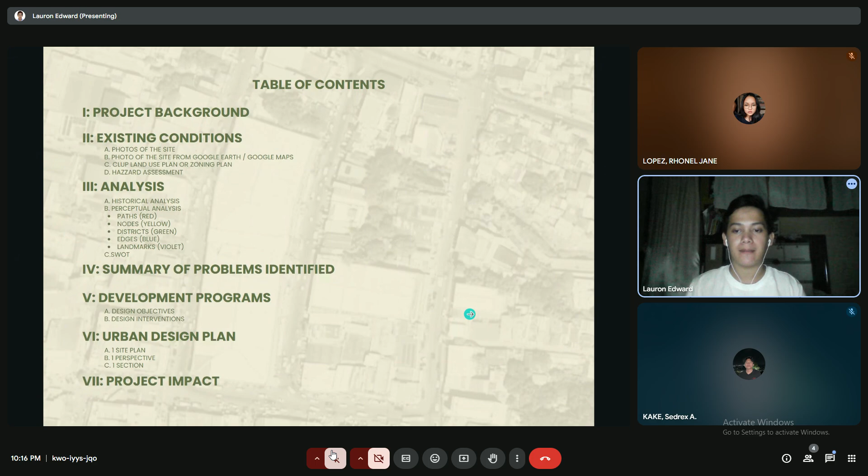So, project background. This project is located in Ipil Street and Vamenta Boulevard in Carmen, Cagayan de Oro. This project aims to improve and have a vital pedestrian and vehicular corridor. The project proposes roadside and pedestrian infrastructure improvements across the Carmen Public Market and Ororama blocks, focusing on sidewalk expansion, paving, designated drop-off points, and vendor rezoning.

The primary design intervention aims to promote safe, inclusive, and efficient urban movements, improve access to public spaces, and support local economic activities.

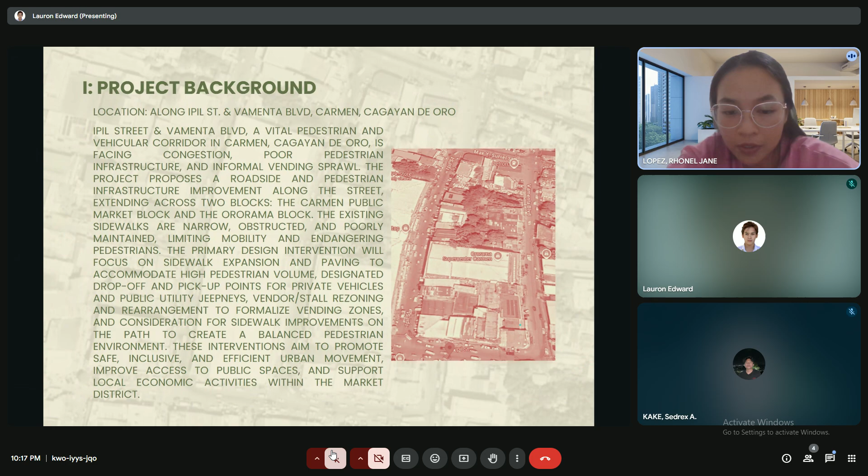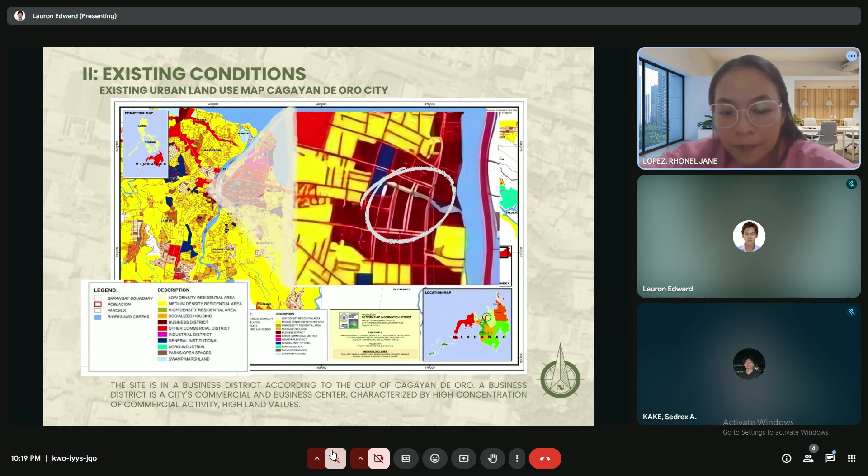Next is the existing urban land use map of Cagayan de Oro City. This displays the existing urban land use map of Cagayan de Oro. It highlights that the project site is located within a district characterized by a high concentration of commercial activities and high land values. The map includes a legend detailing various land use categories and open spaces.

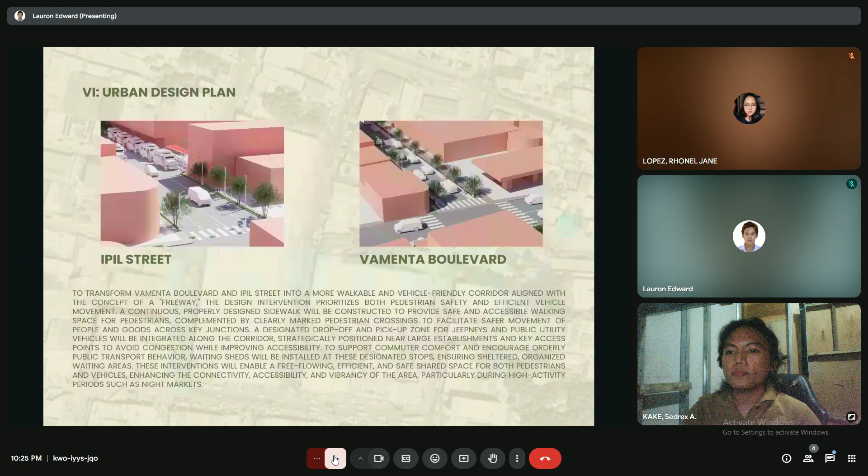So next is our urban design plan. To bring Freeway to life, our design transforms Vamenta Boulevard and Ipil Street into safer, more walkable, and vehicle-friendly corridors. Pedestrian safety is our top priority.

Continuous sidewalks and clearly marked crossings ensure safe and accessible movement. To ease traffic flow, designated drop-off zones for public transport will be placed near key areas, reducing congestion and improving access.

Waiting sheds will be added at these stops for commuter comfort and organized transport use, especially during rush hours and night market activities. These interventions aim to create a smooth shared space that enhances mobility, safety, and the overall vibrancy of Carmen day and night.

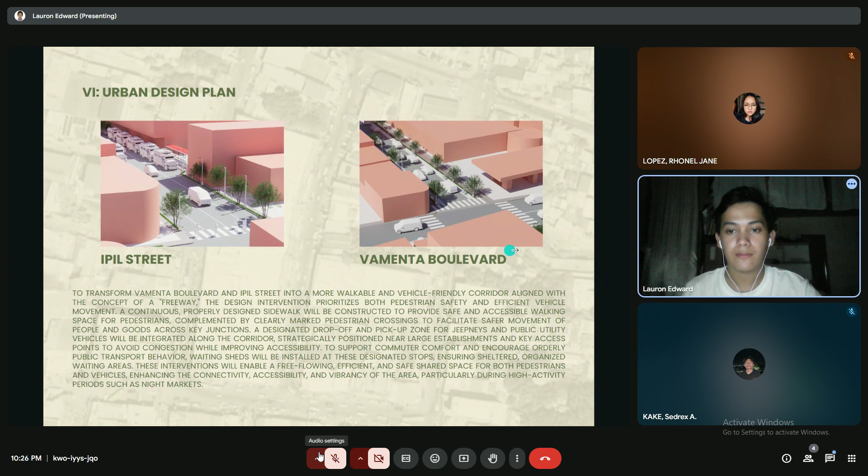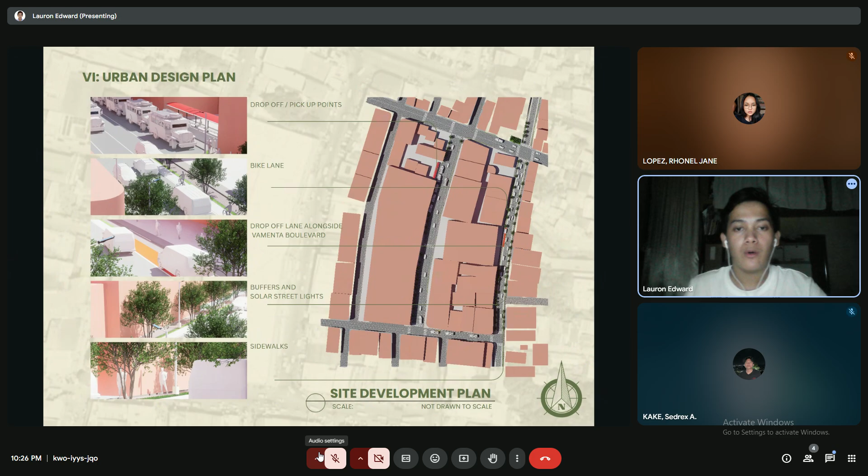As you can see here in our site development plan, on the left side is the proposed design interventions and the location of it.

Next is Ipil Street during nighttime. As part of the Freeway initiative, we also propose a conceptual rezoning strategy for the Ipil Street Night Market in Carmen, Cagayan de Oro. The plan introduces three primary zones to improve order, reduce congestion, and enhance the overall market experience.

Food and beverage zone, general merchandise zone, and arts, craft, and souvenir zone. This zoning will organize vendors according to product type, making it easier for customers to navigate the space while reducing overcrowding in key areas.

To support this layout, we recommend the installation of clear signage, proper zoning markers, and an efficient circulation flow. This will help both customers and vendors move comfortably through the market.

An essential part of the plan is garbage management. We propose placing adequate waste bins and instituting a clean-as-you-go policy to maintain sanitation and visual order through the market. For implementation, the strategy includes a vendor application process, coordination with local authorities, and a pilot testing phase to fine-tune the approach before full rollout.

Through this zoning, the Ipil Street Night Market can evolve into a safer, cleaner, and more enjoyable public space for the entire community.